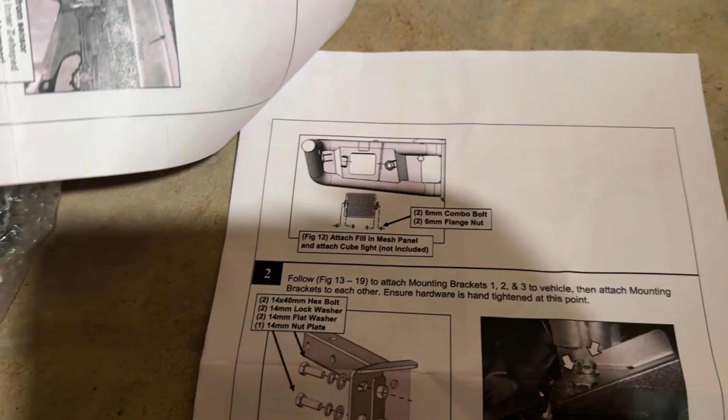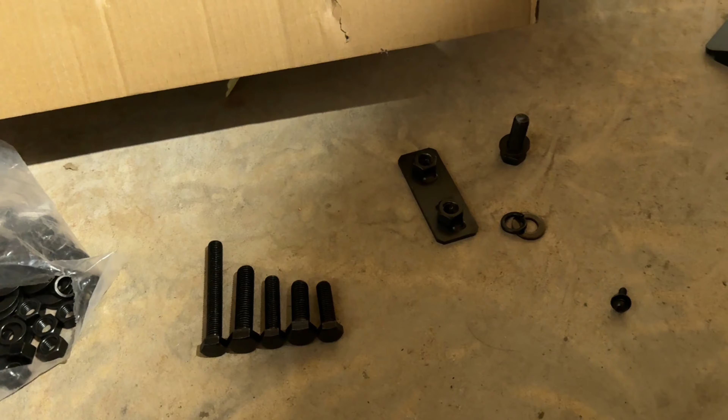I'm going to go over a guide or how-to for this front bumper from Rough Country for the 2019 to 2024 Ram 1500s. This is for the tubular front bumper, as you can see on the instruction sheet. The pictures aren't super great, same with the packaging. They mix all the hardware into the same bag, so I wanted to put together some clips as I go along with this install to help anyone else trying to find a video for this, since I couldn't find one. I didn't go over removal of the OEM front bumper since there's already some good videos out there, and I skipped the unboxing.

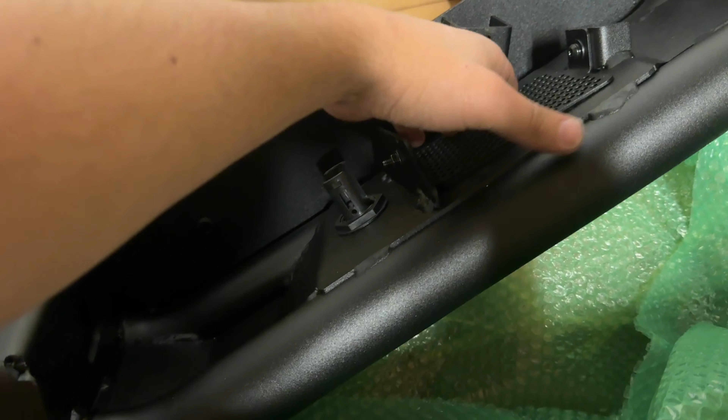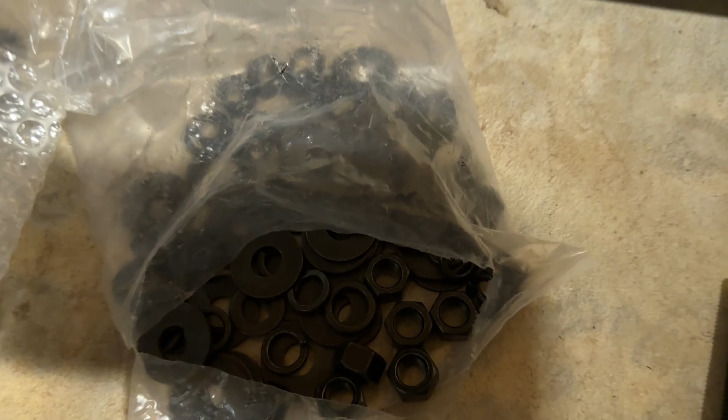So far, all I've done is put on these fog light covers. This is a 10 millimeter nut, and then this screw here is also mixed in with the bag of hardware you get. They should each have a lock washer and a washer on them. They do include this Allen key, since it's an Allen head bolt.

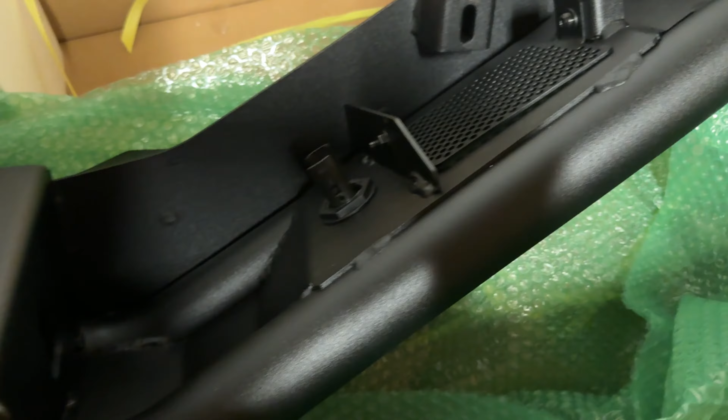So I prepped the front of my bumper doing that. I don't have front parking sensors on mine, so they include a plastic plug to go in place of that. If you don't have the front parking sensors, they just snap into place.

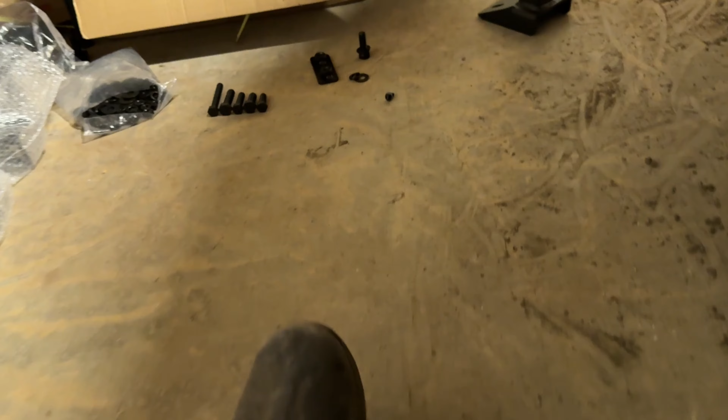So far, this is pretty much step two. There's this support bracket that mounts right here. It says to just do it finger tight, keep everything loose for now. How I found these go is you're going to want the post of this towards the center of the truck, if that makes sense.

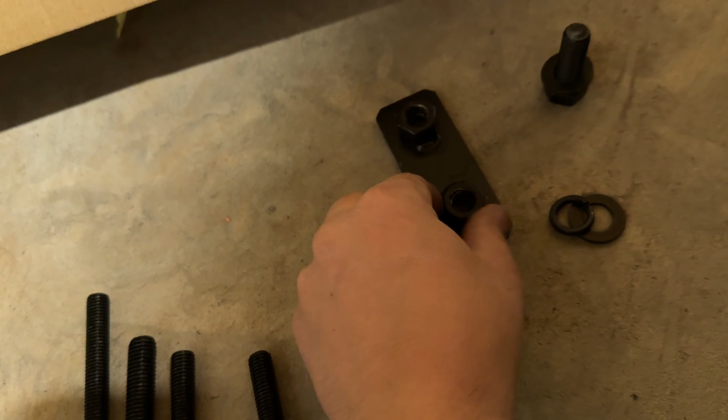So this is the view you got from the passenger side. To mount these on there, you're going to need this bolt, which comes in the big bag of hardware. Then in a separate bag, there's this nut plate, and you'll be using one of these washers, one of these lock washers, put together like that.

The way this goes on here, let me try to adjust my light so it doesn't wash out what I'm showing you guys. So this is actually where the active air dam mounts to. That's what this hardware is from.

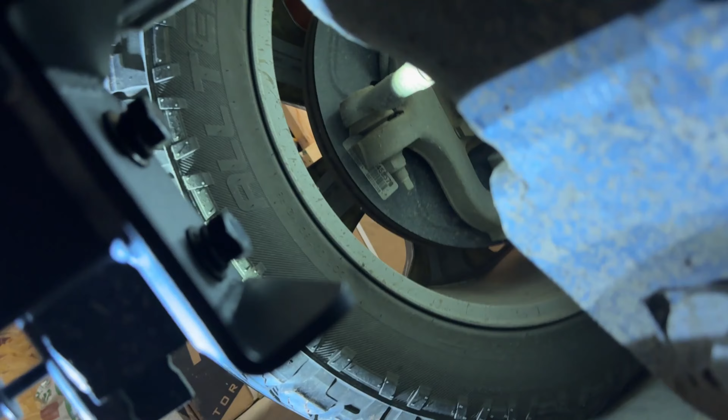So the way you're going to mount this support bracket on is it's going to go on the back side of that, and then that nut plate is actually going to go - probably can't see that - but it's going to go inside that part of the frame.

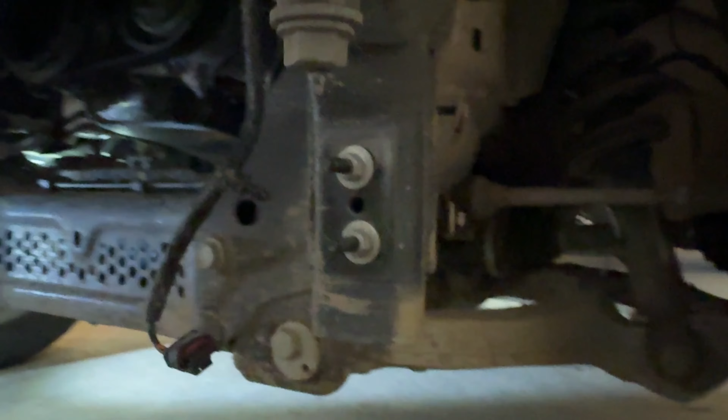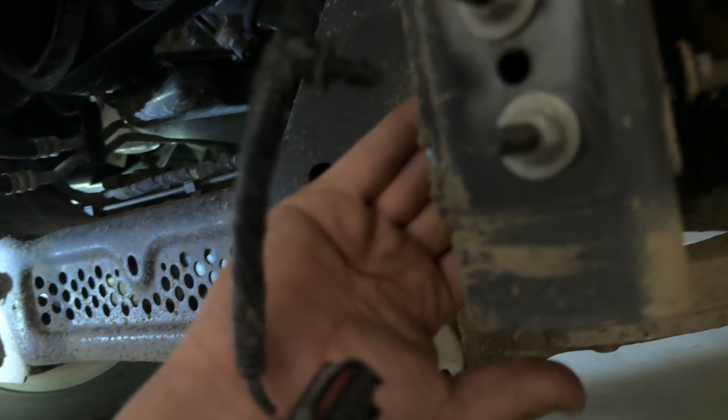So over on this side, let me get focused - that bracket for the driver's side, the bar that comes out is going to be on this side towards the middle of the truck. I'm going to put that nut plate inside of here and then feed the two bolts from the back.

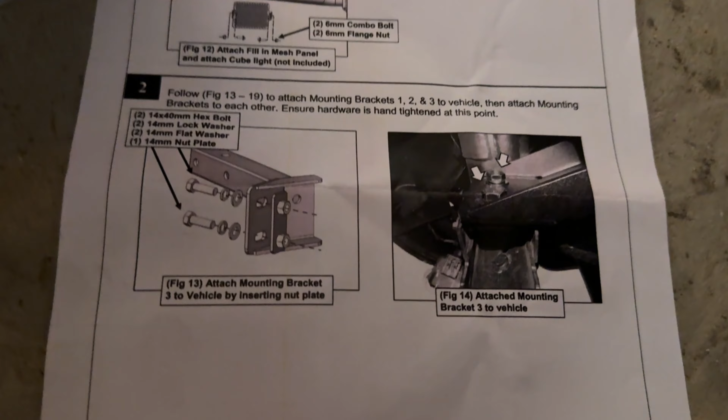So just for reference for step two, this is how it looks with those on. Again, at this point of the installation, these should just be finger tight or hand tight. So yeah, that's how it looks.

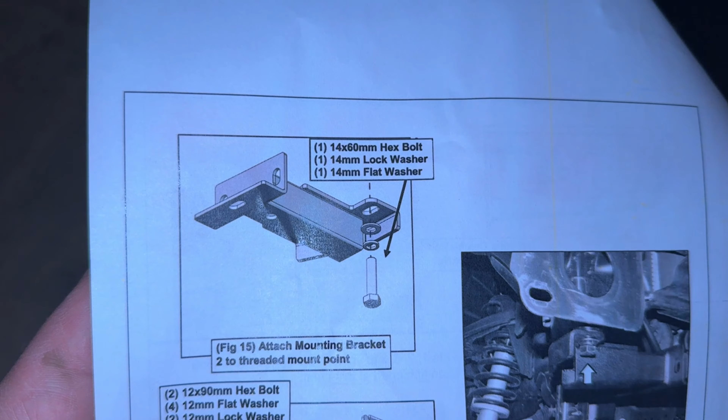Hey, so real quick guys, going over this part of the install. Over here is the passenger side. This is going to be the bracket that goes onto here for the passenger side. It's going to go right up like that. What it's not really clear on, but what you have to do is you're going to loosen this, looks like a body mount bolt.

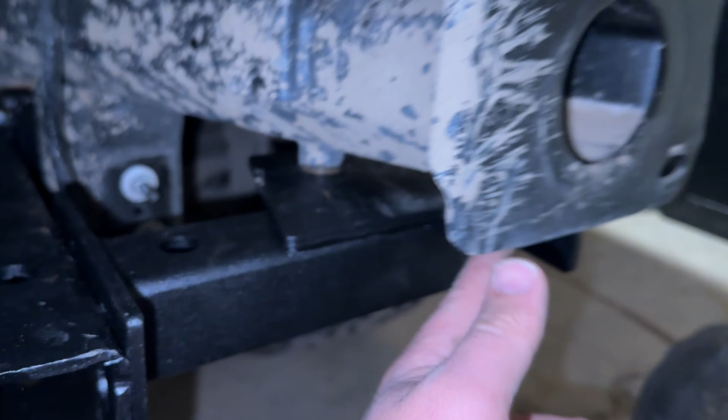Over here on the driver's side, I already went and put that on. So you loosen that body mount bolt, and the slotted end of that part of the bracket goes there. Then for your hardware that comes with the kit, there is a spacer in another bag that goes for this front bolt here, and that goes into a threaded area on your frame.

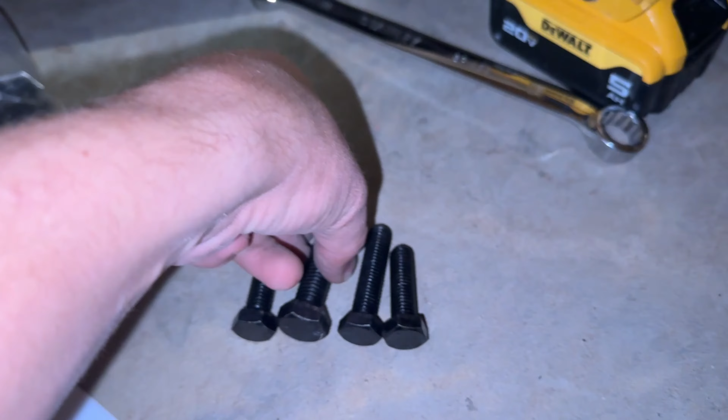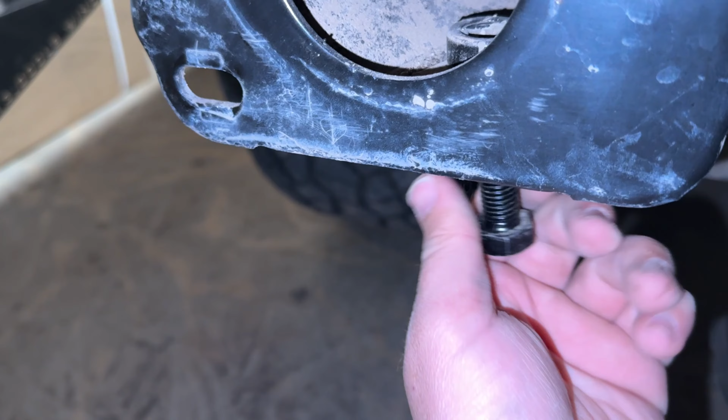This is the bolt that you'll be using that goes into the threaded area of the frame here. You're going to be putting another lock washer and a washer on that. For these particular bolts, I am using a 13/16 socket. That's where that bracket goes on, and we'll keep going.

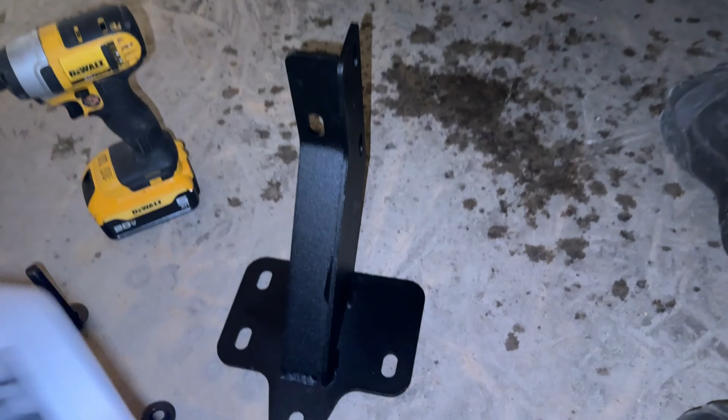We will now be moving on to this larger bracket here. We have this one on and this one on here. Again, this is the one that mounts kind of under where it looks like a body bolt runs through, and then that pre-threaded slot that's already in the truck frame.

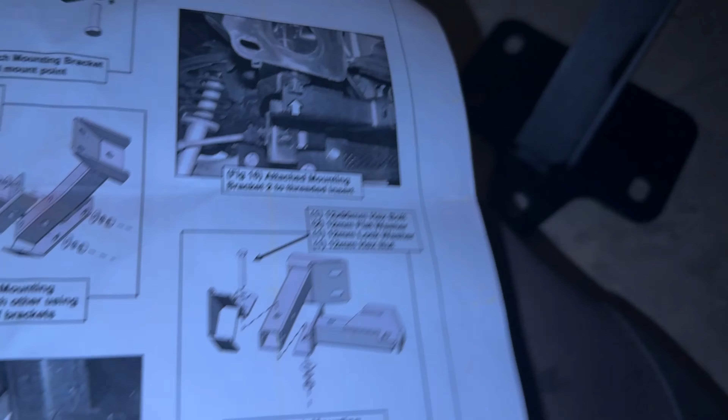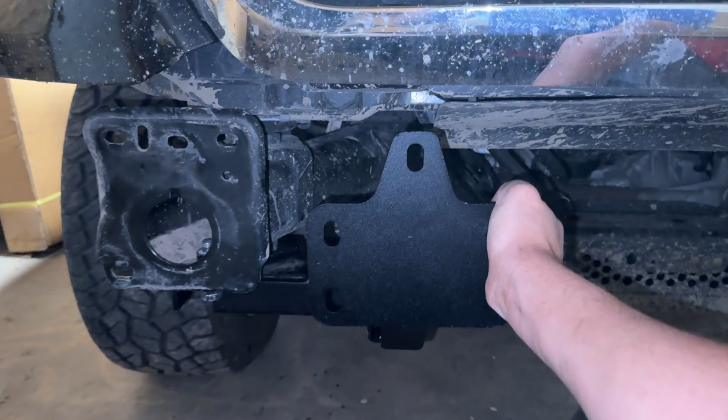The instructions don't make this one very clear, at least not for me, since they cut off the image here. But this bracket here is going to sit, and I'm on the passenger side right now, lining up with the top hole there and with your side holes going across. It's going to sit about like this. I have the one on the driver's side complete.

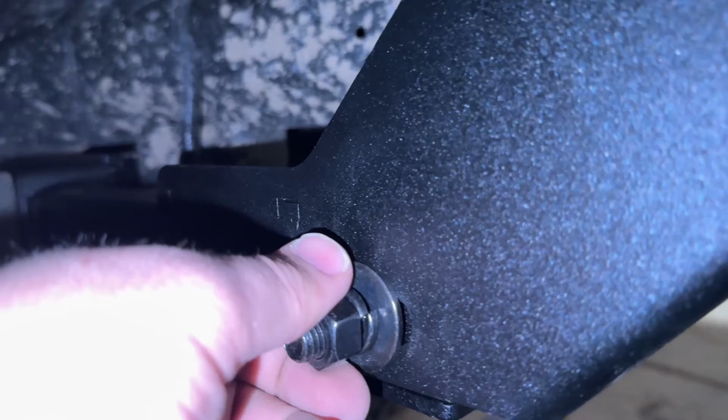This one is going to use the longest bolts that were in the kit, and you're going to pass them from the tire side of the truck in. So it's your longest bolts. You'll use a flat washer on the side that you pass the bolt through, and on the nut side, again, I don't have these tightened up all the way yet since I'm still assembling everything and getting it to line up.

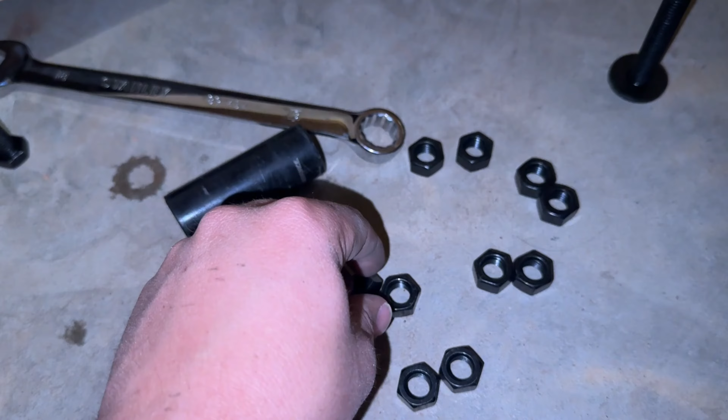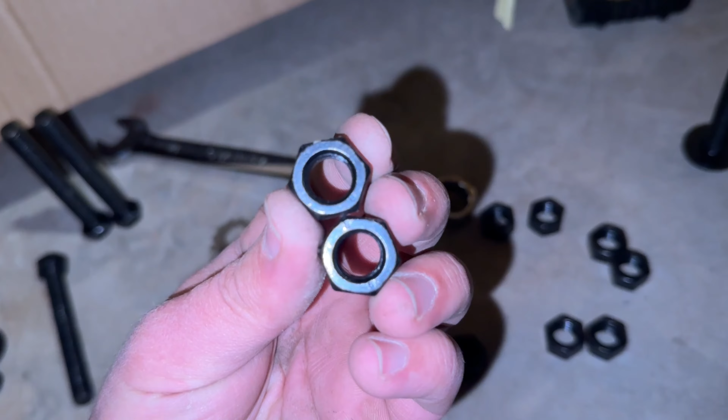Just not tightening down everything all the way quite yet. Anyways, you'll use a flat washer on this side, a lock washer, and then a nut. One thing to note, in the hardware included there are 2 lock nuts, or self-locking nuts. It doesn't specify to use those yet, so just check which ones you grab out of the bag. We'll keep rolling on.

I think we're getting down to the last of the brackets here. It's going to be this one, for the driver's side. These kind of weird shaped smaller brackets - again, they don't do the greatest job on the pictures.

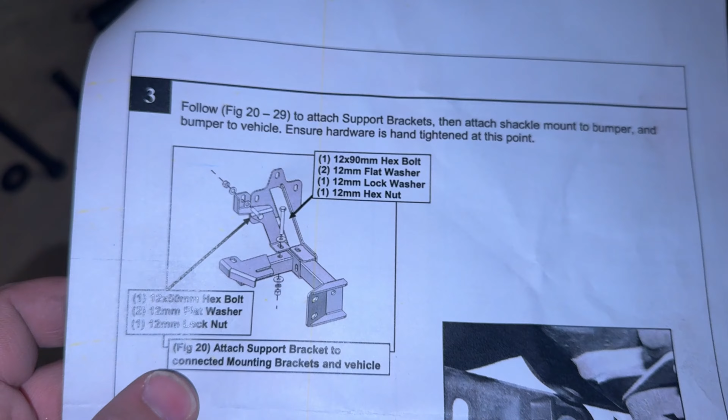From here, it looks like it's actually going to be right next to this and flush with it. That's how this bracket is actually going to go on. It's going to sit on this one here, on top of it, and you'll use the longest bolt in the kit again with a washer on top, a washer, lock washer, and a nut on the bottom.

Then it's actually going to come right behind where your OEM bumper was mounted to, and you'll use, I believe it was the second longest bolt in the kit. You'll use a washer on the back of it, feed the bolt in through the back, use a washer on the front, and this is actually where it calls to use the lock nuts. So that's the passenger side there.

Over on the driver's side, you're going to feed this bracket in from behind, and then it's going to sit right here. You'll drop that longer bolt in from the top, straight through there, and the other one's going to go right through here. Bring that one in from the back, lock nut on the front.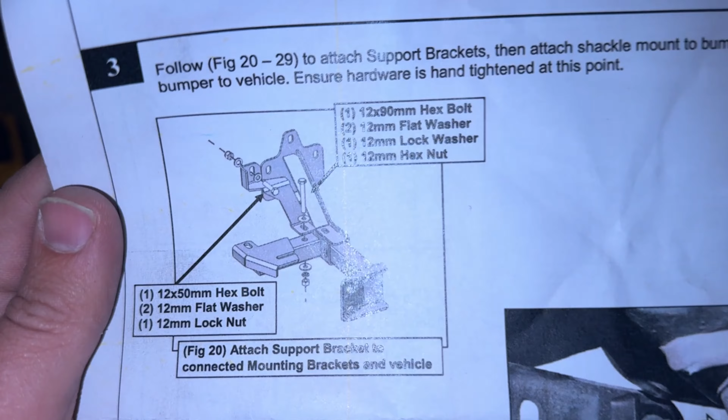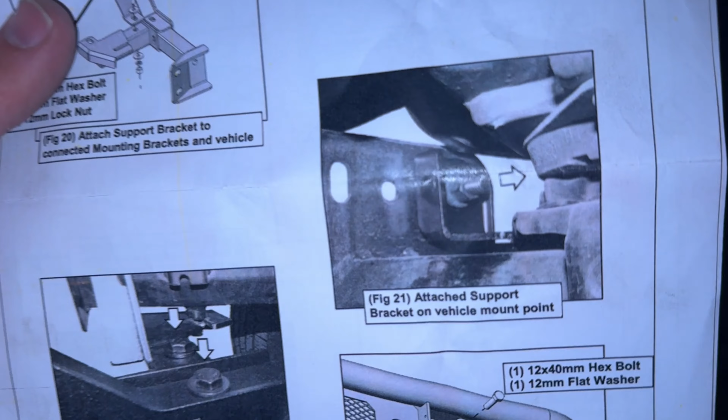Something to mention real quick - previously I'd stated when putting on this bracket that mounts to the old OEM bumper mount, I had said to feed the bolt in through the back, just going off of what Rough Country illustrates in the instructions. But looking at their picture, they actually fed the bolt from the front, as opposed to their illustration showing it being fed from behind the bracket. So I went ahead and swapped it to be in front instead of behind, like here. Obviously didn't switch this one yet.

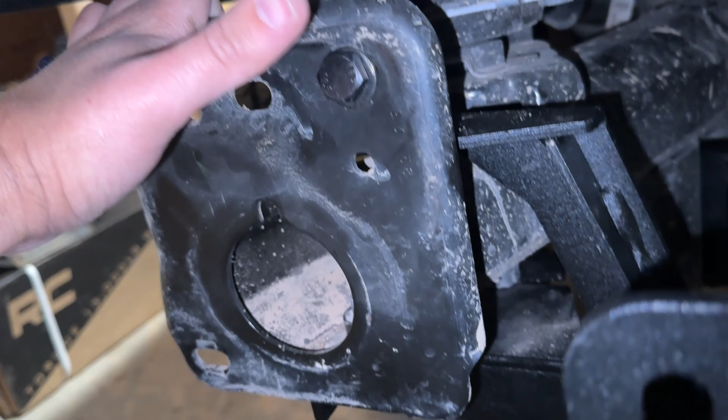Just going off of their photo, I'm actually going to run it this way. I'm not sure if there's going to be any clearance issues having it the other way, but just thought I'd note that.

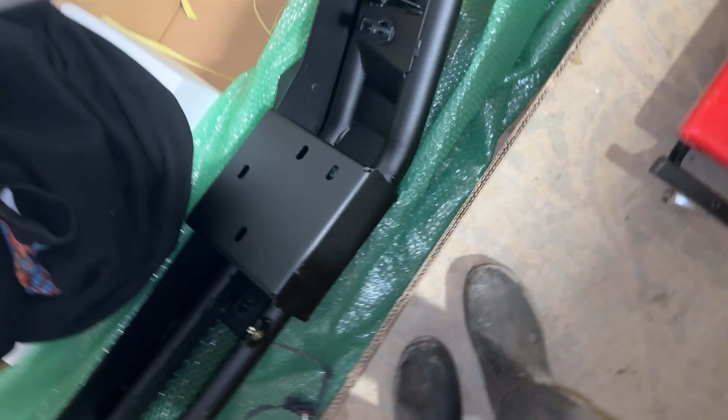One more thing to note, my bumper is I went ahead and opted for the bumper with the winch mount. I did remove this parking sensor plug as well as this one. I just pushed them through with the end of my pliers, the end of my Leatherman, because if you have the winch mount, it actually has parking sensors for the front of it to relocate. So I popped those out to put them in the winch tray here, just thought I'd mention that.

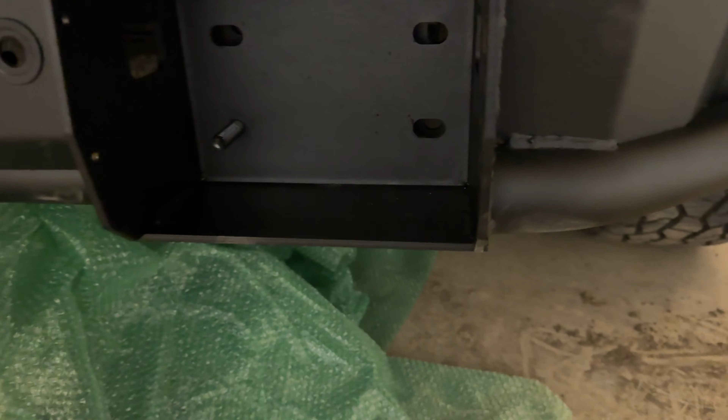Hey guys, so now we have the front bumper somewhat on. There is a single top bolt, one on each side, that goes in first to sort of hold it. Everything's still pretty loose right now, just so I can get things lined up, so it's not sitting level yet. I would definitely recommend having one or two extra sets of hands if you can for this, just because it's so difficult to maneuver. So yeah, this is as it's sitting for now.

There are other steps to proceed if you did not opt for the winch. I did opt for the winch mount, so if you also have the winch, now is the time where you're going to be starting to get that put on. Either end of that winch tray will line up on these sides, and then have hardware that is included that passes through here. If you don't have the winch mount, this is when you would put on just the normal tow hook shackle mounts. So I'm going to get rolling on the winch portion now.

So we're pretty much on the home stretch here. Again, mine had the winch option, so instead of putting the normal shackle mounts in, this winch plate or winch mount goes in its place. Another thing to note, the winch tray actually did come with parking sensor plugs, so I just popped them in on the bumper there. No need to remove and reuse them.

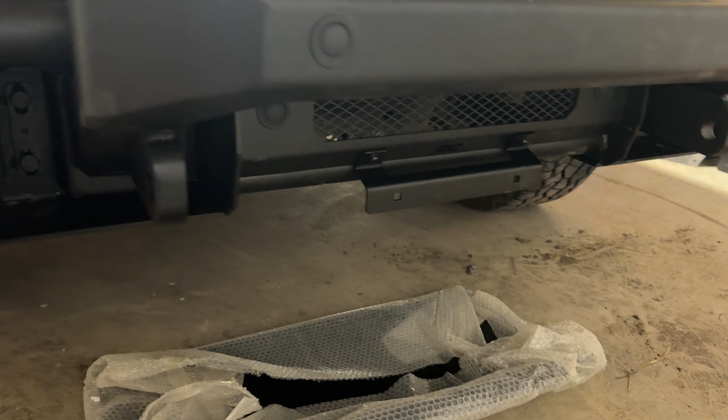I did reach out to Rough Country as I've been unboxing stuff. There's been quite a few chips, dings and scratches that I found, kind of just throughout different components of this kit, so we'll see if they respond or what they can do about anything. Another thing to note is even if you do have the winch option, these do come with a license plate mount still, if you live in a state where front license plate is required. But yeah, this was pretty straightforward.

I imagine the tow hooks would be as well. Right now I am working on the front skid plate, and right here is the bracket for it. It actually mounts where the automatic air dam was mounted. Another thing to note, most of the pieces of this kit, or all the ones I've checked so far, are marked with a P for passenger side or D for driver side, so it makes things quite a bit easier. But yeah, this is how we're looking so far.

Hey guys, so this is the bumper after 8 months. I've been pretty happy with it so far, and I think the install is something that most people can handle themselves in their garage with basic tools. I would say it is best to have a second set of hands if possible. Overall, I've been pretty happy with the bumper.

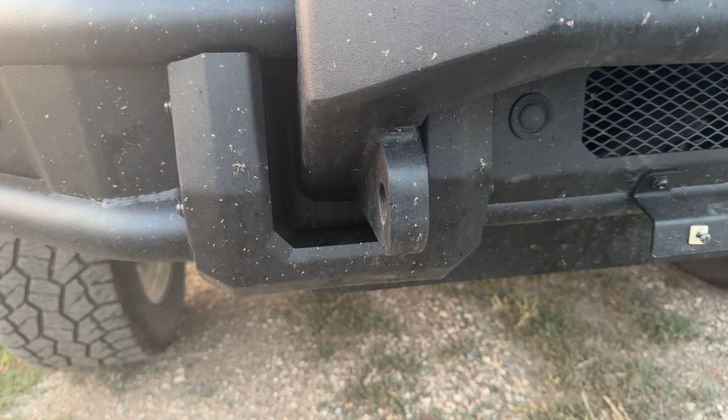One thing that did happen a month or two ago, I was driving down a gravel road and one of these shackles that go here on the front fell off. So since then I decided it was best to just leave them off of here. I did also add these lights from Rough Country. I've been fairly happy with these, running them as my fog lights. I just bought some adapters off of Amazon so I could plug them into the factory harness.

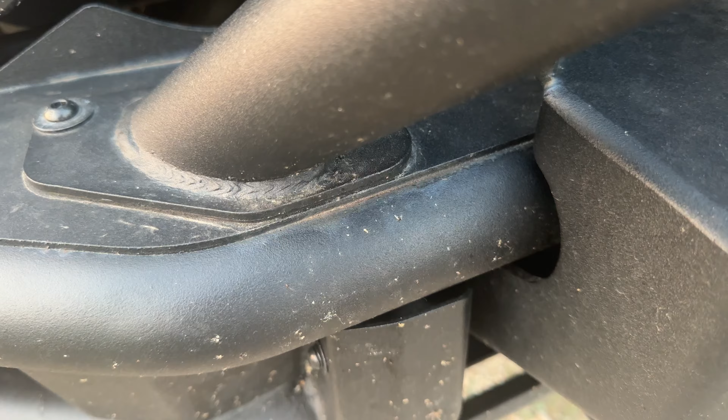Sorry for all the bugs on the front, it's summer here, so bugs are out in full force on the highway and interstate. But overall I've been pretty happy with this front bumper. It's held up pretty well. It might be starting to show a little bit of rust there after only one winter, and you can see it a little more here, but honestly I think it's held up pretty good. Nothing's really shifted on me or anything, it's stayed pretty solid on there. Hasn't moved too much or caused me any issues. Overall, I'm pretty happy with it and would put it on a future truck.